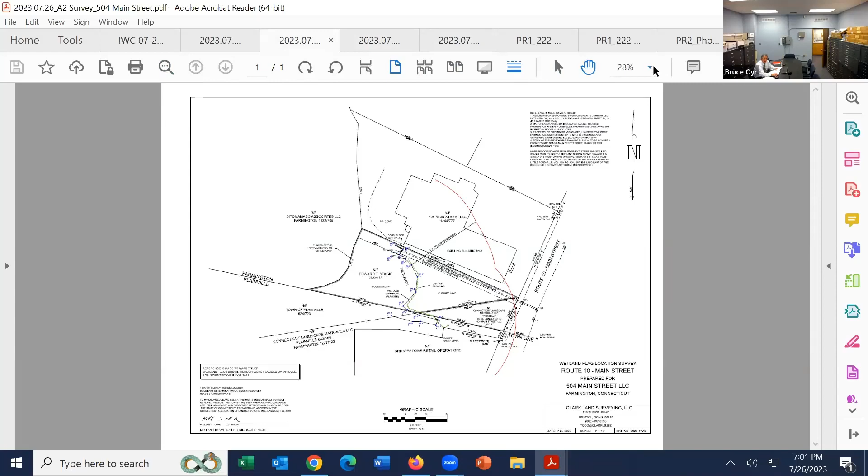I did get an updated survey from the surveyor. You can see where the wetlands pretty much follow the toe slope through that whole thing that has been marked out, flagged out. I guess he flagged it like a day or two before the meeting last two weeks ago that I wasn't aware about. So we met them and he mentioned he already did it, they just didn't have a chance to get us a map. So the wetlands have been flagged.

We met on the... but Bruce, go back to that map for a minute.

Because it looks like there's two property owners. Yes, here's that line, here's the one that he bought, he purchased this, and this is the one he's trying to buy now. So as we said last week, a large part of it is on property that is not his. He mentioned he's in the process of working with the attorney. Unfortunately the person has passed away and their heirs had passed away too, so it's a very long list. He's working through the courts right now to get this resolved, but apparently it's pretty easy, is what they said.

So I went out there on the 17th, right after that 3-inch storm we had that Sunday. I met up with Ian Cole, the wetland scientist. The surveyor was out there as well as the owner. So here's some pictures that we had taken.

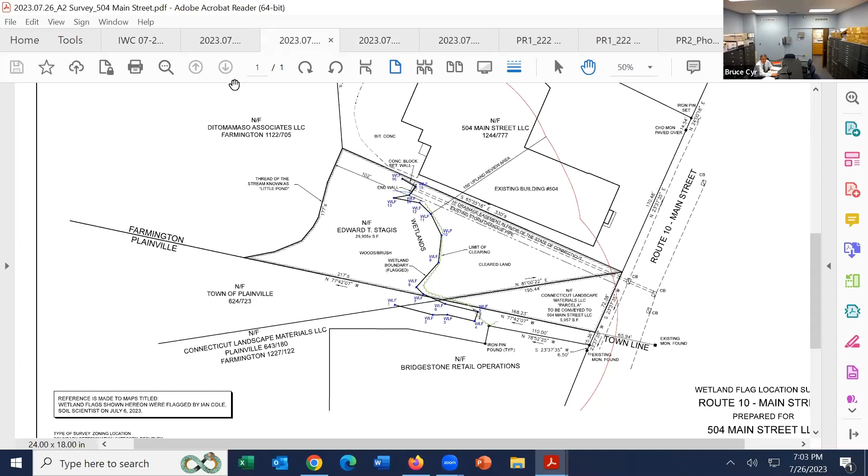Here's that large storm drain outlet that comes from Plainville. It drains a big section of Plainville, comes around and back to here, comes down, curves around, goes out, and then goes out to the Pequabuck in that direction. So as you can see, is that the state owned drainage?

No, the state's on the other side, on the north side. But here we are looking to the north along the side of 504. This was the area where he had put some fabric or some geotextile down to try to stabilize it.

Wrong way, sorry, wrong way. So you can see where the river had backed up into this little tributary swamp, and it had put this silt fence underwater in certain locations.

Pretty much right up to the toe slope is how far it came. And here's some of the flagging he did. So I think when you look out here, you'll see he more or less staked along the silt fences where it was.

Here's the outlet along the south side of his property that he wants to extend. So I did discuss with him our concerns: if this is a 3-inch storm and the water is backing up as it is, extending it further could only exacerbate the problem. So they're aware of that. As it is right now, that outlet is underwater.

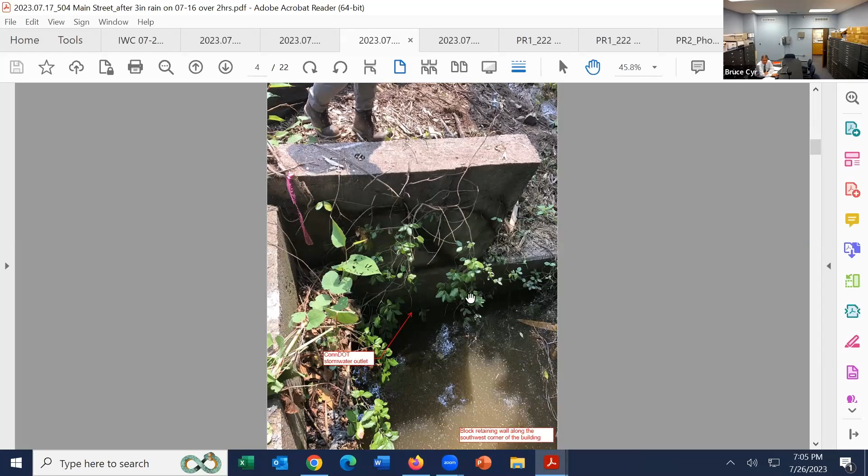And this is the wall along his parking lot that's starting to fail, and the water comes out this way. So he is claiming that this is undermining his retaining wall, and it is starting to collapse. It's just a bunch of concrete blocks and mismatches. This is off the back side of his property, beyond the parking area.

So this is looking out at the tributary towards the Pequabuck. It's pretty much right up, pretty much follows his toe of slope all the way around and then along the back. So at that meeting, we did discuss with everybody what we wanted to see.

As part of it, we talked about pulling this slope back to a minimum 3-to-1 to soften it, so it would stabilize better. Ian Cole, the wetland scientist, said he wanted to see this stuff removed, he was concerned with amphibians coming in and out, not wanting them getting caught in the mesh, which looked like it had fiberglass or plastic in it. He did not like it and wanted it out if possible. So I said if we actually pull it back to 3-to-1, then it should work. And we also talked about what you have here.

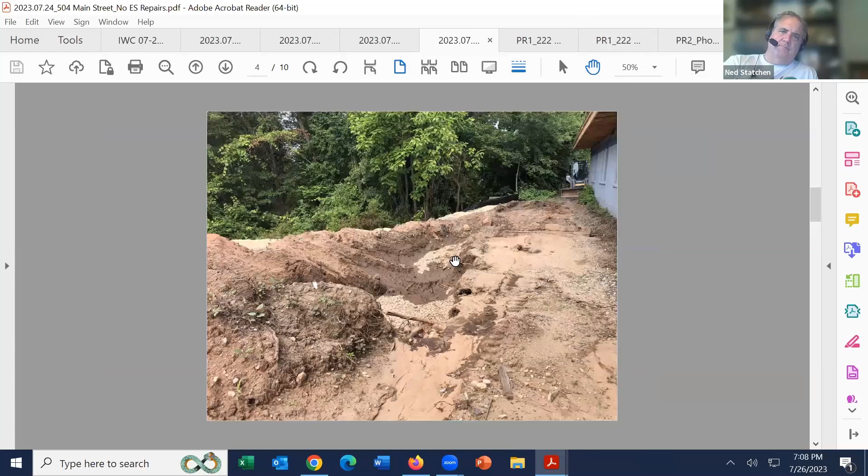So as I mentioned to him about getting some sedimentation basin in, he dug this large hole in here, and we'll see how that works out for the time being.

The water has subsided at this point. Also, we talked about digging that pond. We also talked about resetting this silt fence that was damaged, and adding hay bales or straw wattle, something along those lines for erosion control, to actually reinforce it, and then to grade the slope back 3-to-1.

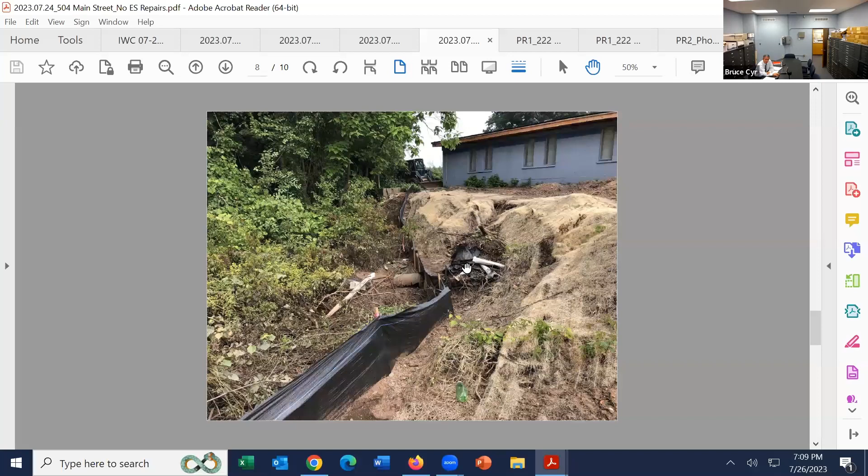So at this point, a week later, the work was not done. You can see the slope right here, that's where the roof leaders were coming down, washing out. There's a bunch of debris that he had pulled out of here and from the property, he said.

You can see how the water has receded back. But even looking at this picture, if you look at the silt fence, and you look to the right of it, that area looks considerably lower than the area to the left, which is where a lot of sediment appears to have accumulated. Or is that just an optical illusion? I think it's the type of material too, a little bit of both. It's the fines coming off the top and just washing down.

This was after that 3-inch storm, so we had quite a big deluge here.

I had since talked with the owner, and he is out of the country. He had a death in the family, so he could not make the meeting. I mentioned that we were having the meeting anyways, and I expressed how important it was to resolve this issue, because I want to get the erosion control in.

We talked about at the last meeting possibly doing some test pits out there along that silt fence, just to confirm the wetland location. Ian mentioned he had gone back, dug down as far as he could with his core, and he was pretty confident that was the wetland. But I said, you know, the machine is there, I'd like to just double check, do a few test pits, and confirm it is, as you say, along that toe of the slope. So we talked about that.

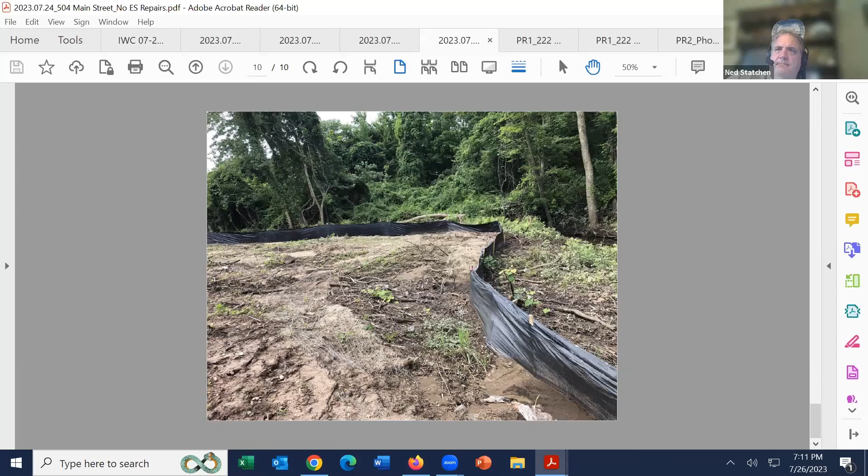We have been getting, as you know, quite a bit of rain, so there's a good chance we may get something to come up there. I said at least it'll help. Then after that, when we get into September, October, that's when I'd like to get the plantings installed, or whatever we agree on for a final restoration plan.

So Ian is still working with the owner. They have not agreed on a contract at this point, so they have to get that going. But I was pretty clear with them that by the first meeting in September, we should have something for the commission to look at.

Assuming that we need two meetings to go back and forth, he's ready to go the first week in October.

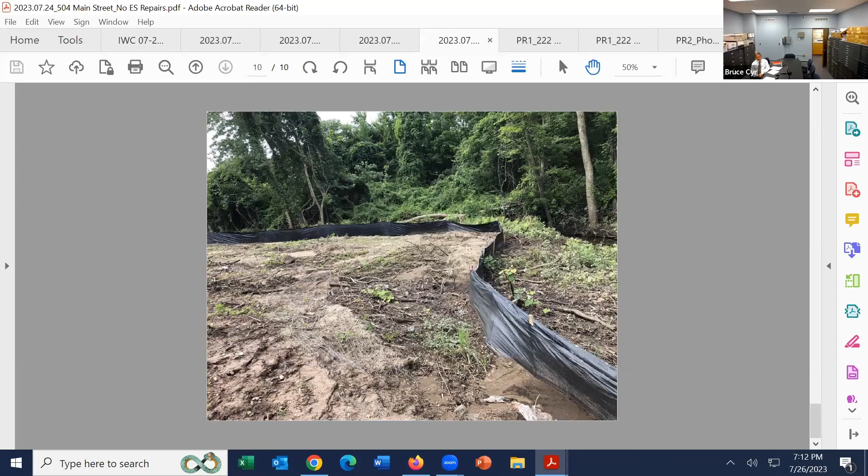So if anyone has any questions, just let me know. I'm not sure where to start. I guess I'll start with Rich. What's your feeling on this?

Well, I think Bruce has got all the key areas covered. I mean, getting it at least temporarily seeded so we're not getting any worse than it is, and doing something so that the roof leaders don't destroy the place.

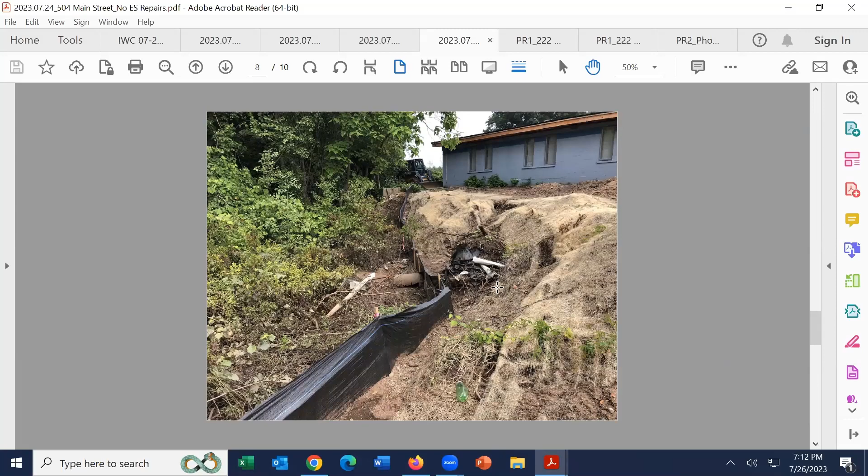As long as it doesn't get any worse than what it is, I think we'll be doing good.

Okay, Dave, your feelings? For the record, I did watch the meeting I missed last time to hear the start of this terrible saga.

I was wondering, it seemed that the map you showed, the wetlands kind of coincided with the extent of clearing. Yes, everything that was cleared was not wetlands, and what was left was wetlands.

You were talking about making test pits. Are we going to do that? I would hope to, to make sure that some of that cleared land wasn't also wetlands. Up in here, yes, that's what I was talking about, because when we were...

Yeah, I just wanted to clarify that. Exactly, so it'll be on the uphill side of the silt fence, just to confirm that this line did not move up at all. Okay, that's all I have right now.

Thank you. Thanks, Neil? I don't have too much, just a question on the picture you just showed, Bruce, with the fabric material, whatever that consists of.

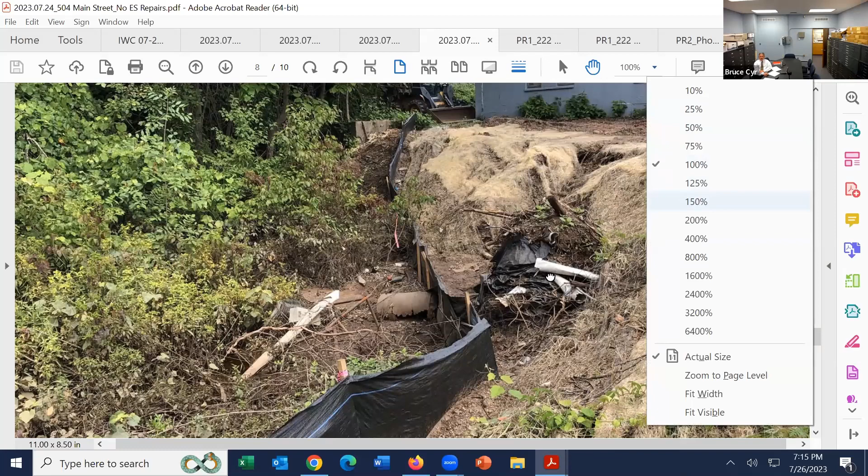Is that a pipe in that photo, or is...? I think it's a rotted-up piece of an old drum. Let's see, okay, I think that's what it was, see, it's like an old drum. So, like he said, there was a lot of debris on the property.

You could see there was a lot of debris on the other side of the fence down in here. I think partly maybe some of that is from the storms over the years, as the water level rises and falls, it's bringing all this debris along the river as well.

So I think kind of a backwater. Yeah, it's kind of a combination of both. I didn't have anything further.

Thanks, thanks, Mark? Yeah, the only question I have, Bruce, is on the pictures, there were two pictures that showed you outlined in red. Were they what you suspect as the wetlands area? What was that all about?

Oh, that was before, that was the earlier map I had, but I think what it was, just showing what we were doing, is we were using that map out in the field to mark it out. So that was just showing the red location of the wetlands, and we had some notes written on there. Unfortunately, that was the only clean copy I had, but I wanted to get something over to you guys so you had it.

I just got this cleaned-up map yesterday. Okay, I have nothing further.

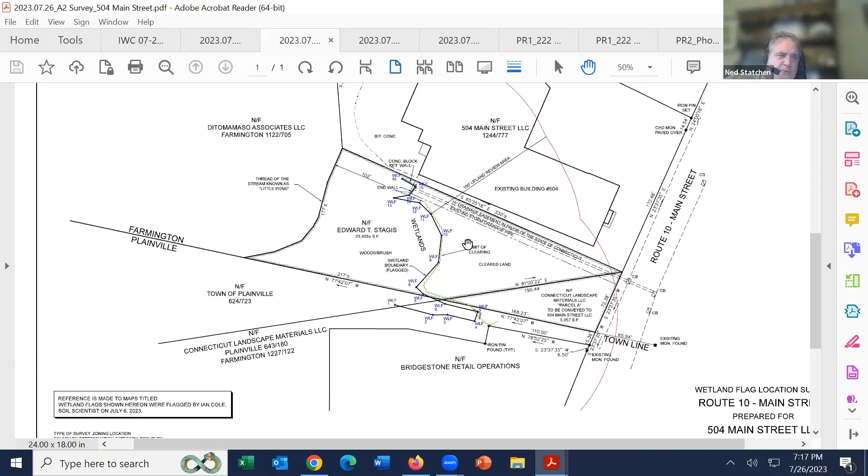Thanks, Mark. Ned, can you just review again what property is his and what he's trying to buy? He owns this - he owns 504 now.

You can see the property line is very close to the southern side of the property. He purchased this property, and this was part of a larger piece. Here's the Bridgestone property - yes, it had a larger piece that extends out and goes into Northwest Drive. So the owner had cut it at the town line and sold him this piece here.

So he owns this, and he's in the process of purchasing this. Apparently, he has spoken with one of the descendants, and they don't even want anything for it. They said, just take it, we'll give it to you. I didn't even know we owned it.

It's all - a lot of it's wetlands. There's nothing you're going to build there. But apparently, as part of the probate, some kind of fee has to be done as part of an assessment or whatever. So that's what they're working on now.

Okay, then like where the river is, I mean, that's all wetlands. So now to the other side - but does he have to work with whatever is on his other side?

What do you mean? Like if you look at the GIS map - it's 8384. It looks like it goes on for a long distance, but does it end? No, let me go back and show you. Let's go back to ours.

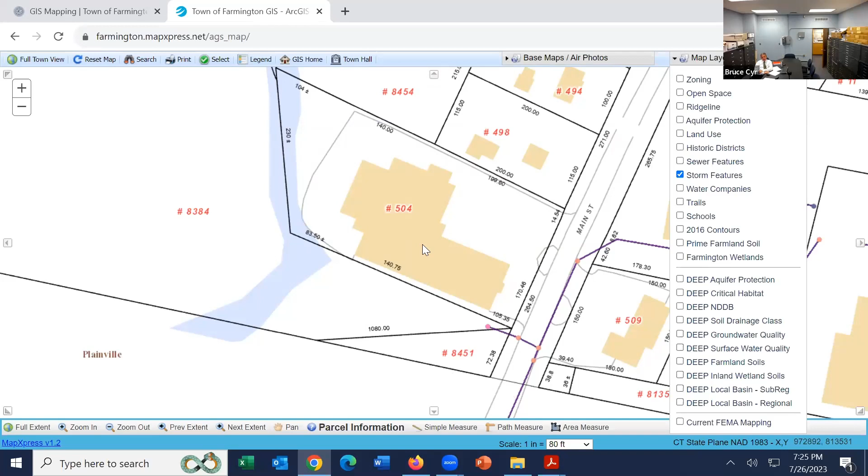So, without coming... on land he doesn't even own. That's the thing that kills me. Although that seems to be a growing trend in Farmington. I think he was pretty confident that he was getting the property from them, and then when it got buried it got put into the probate system, that kind of just put the brakes on it.

That's all I have. Thank you.

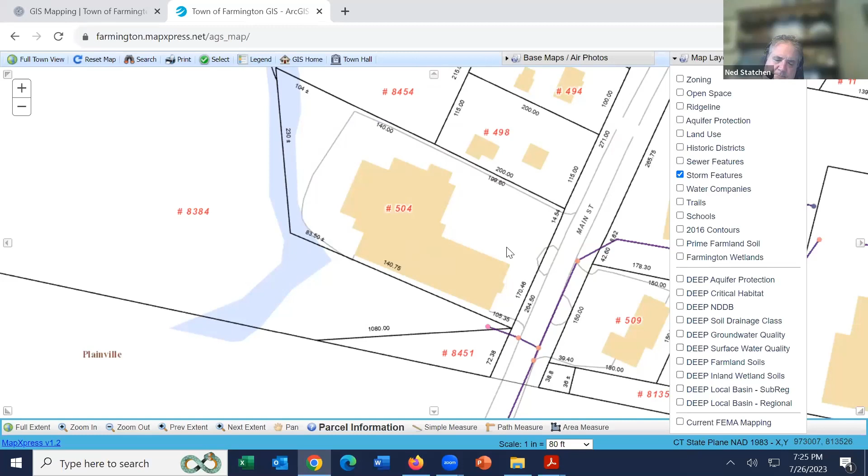My general feeling is we're already several weeks past when seed and hay should have been put down to start trying to stabilize the site. We started on June 28th, that was when we first saw this. So we're going on a month.

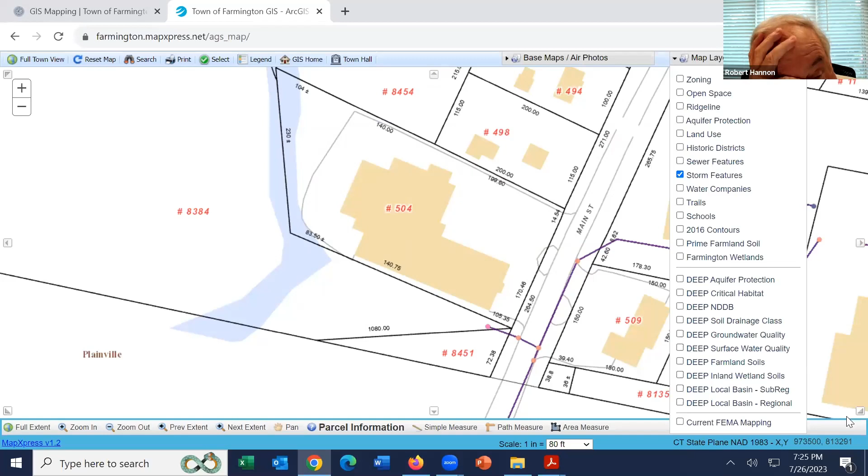I don't have an issue with the 3-to-1 slope. I know it makes it easier to stabilize. And having the erosion control measures at the toe of the slope is good, but again, the way I'm seeing the water run off of this site, I think there need to be erosion control measures at the top of the slope as well.

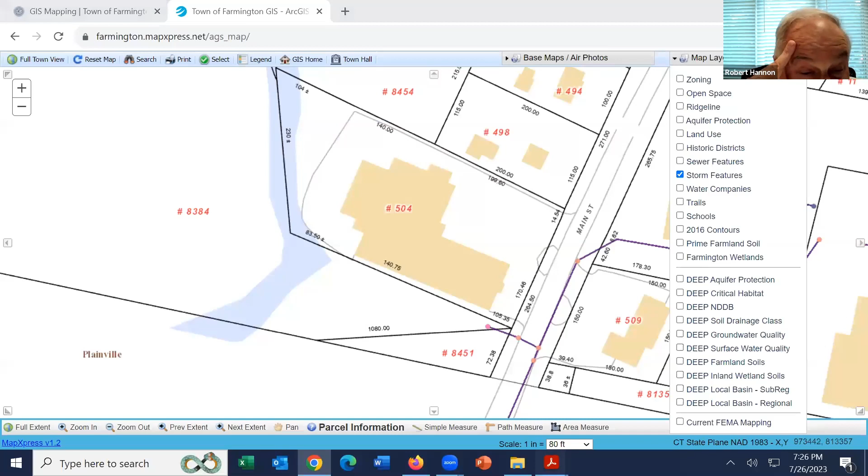Where it looks like he's taken a bulldozer and cleared off that whole strip of land right by the building, he needs to be putting in some kind of check dams over there, whether it's hay bale check dams or stone check dams. I don't particularly care. We had talked a little bit about that as well. You're talking about this right here.

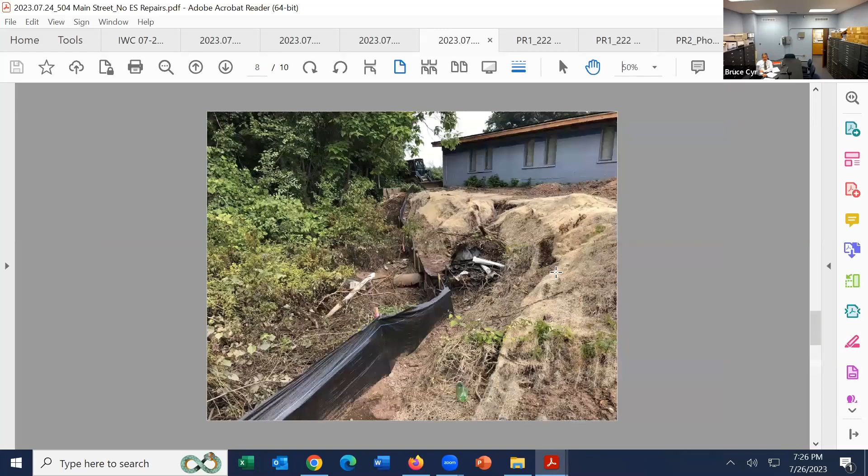Right in here. Yeah, I mean, you've got to put in some kind of check dam, whether it's a hay bale check dam or stone check dam. That's not an area that's really supposed to be used for vehicles at this point in time. No, it's not. He had pulled away from it.

The only concern we had with that was these doors. As Ned said, this building is really funky and weird, and there's all kinds of step ups, step downs. The only thing I was really concerned about, I told him, is those check dams can't be very tall, because it could actually build up and run right into the building. So we did have some concerns with that.

I understand that, but you've got to slow the water down somehow. Yes, it can't just continue free flowing like it is.

And again, it goes back to the old issue we deal with, it would have been so much easier for somebody to come in and just talk to us, to let us know what we wanted.

And it may have ended up saving them a lot of grief and aggravation in the long run. But he's gone ahead with this. I think he's alienated members on the commission, and if he's trying to do anything with this site, my guess is it's going to be a long memory. I don't think people are willing to cut him any slack on that. So he's going to have to make sure anything he comes back with is top notch, and probably have to go above and beyond what somebody else might, just because of what he's done here.

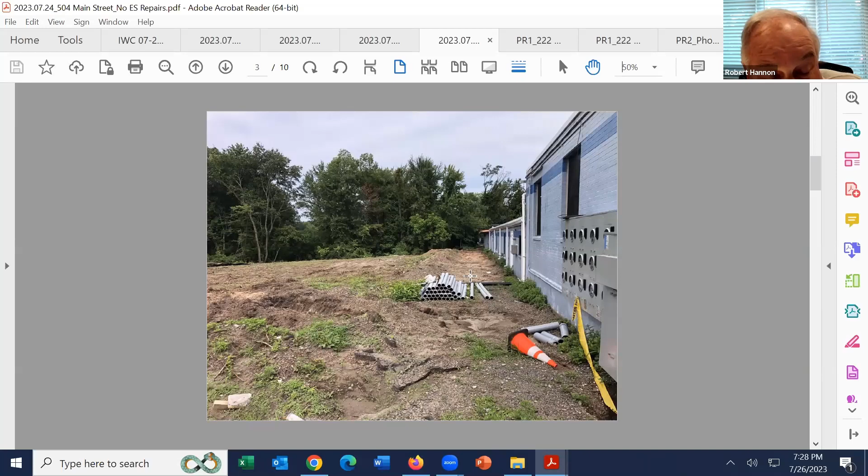That's what it looks like. The netting that he put down, to try to stabilize the slope, without stabilizing the slope first. This is why it looks pretty funky out there with the way the mats are laid. So yeah, to me, he's really at least two weeks past where he should be on this site, if not longer. I thought we kind of mentioned that the first time we saw him.

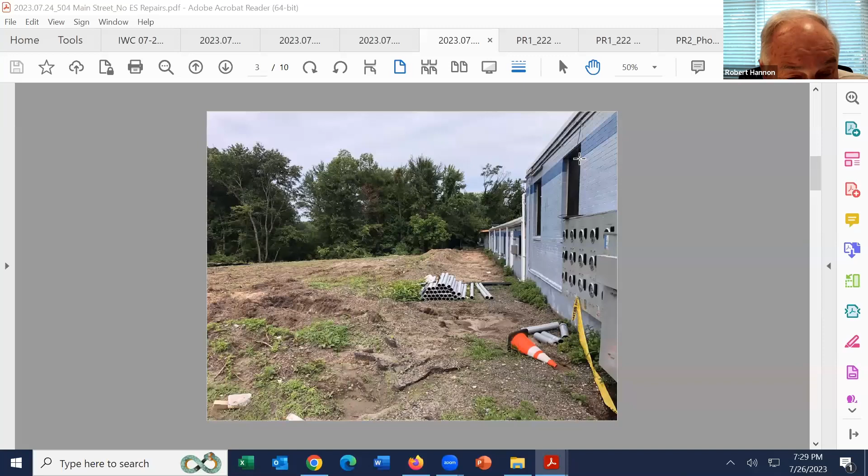I'm just not overly thrilled. And again, he does not have a contract for the wetlands party. Who does he have a contract with for doing any work out here?

I think all he has right now is a surveyor, the surveyor slash engineering office. So I think what happened was the engineering office had called Ian, who they work with, and he had gone out and taken care of it. So that was the immediate concern at that point.

So I think the next thing is for them to actually sit down and come up with a contract, because number one, we don't even have the wetlands report. All we have is the wetland delineation at this point. So I think we want some kind of wetlands report and a wetlands function and value assessment.

Not knowing what that is right along the toe of that slope. Is it just a drainage area? Is it a valuable wetland? What's in there? Maybe Ian can attest to that, and that's going to tell us how far off we're going to need to be offset.

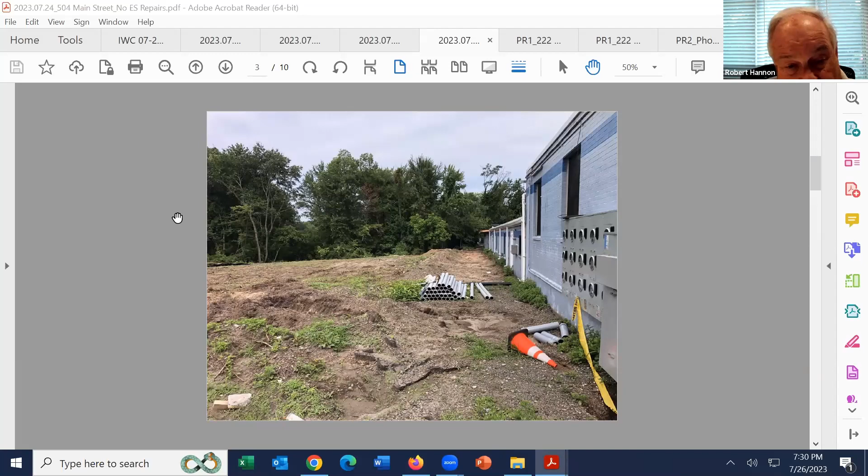Yeah, because again, looking at the way the property is currently laid out, and you were showing it, that was the state drainage, right? That was actually backed up to the top of the pipe. Yes.

Do we really want the toe of the slope right there?

Herein lies the problem, and that's kind of where I was going with Ian. Ian had said he did a lot of research on this before he went out, and he said pretty much, from all the historical photos and historical information he had, this is pretty much where the toe of slope was.

So pulling it back, yeah, we can do that. But I think that's what he was pretty adamant about, that this is where the existing limit of disturbance was. Yeah, but that doesn't mean we have to have the slope go right down to the wetlands either. Nope. It's something that definitely, once he gets his report and we get these guys at these meetings, we could start discussing these questions with them.

Well, I guess the concern I have is, maybe it's the language you're using, because I'm not sure discussing anything is going to get much done here. It may be more a matter of telling him what to do, because we've been discussing it for about a month, and it's like nothing's been done.

For one, I'm just not thrilled with what hasn't occurred here. Me as well, I'm not thrilled with what did happen there either.

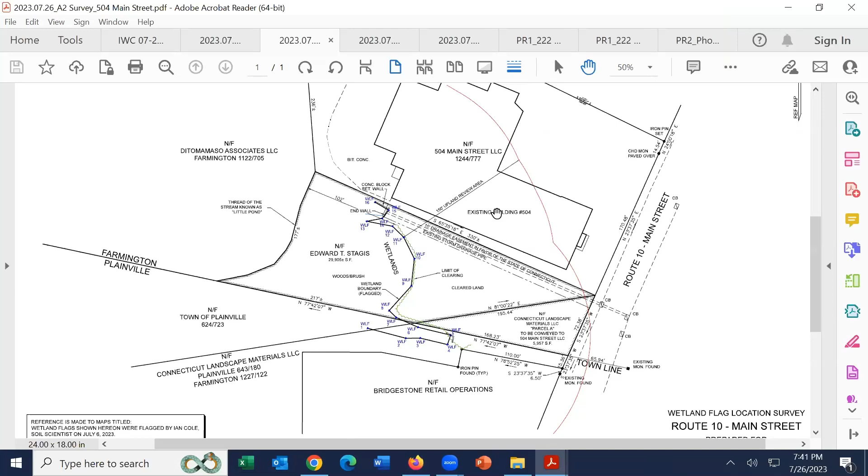The other thing is I know he's got concern with this wall and the drain, and he wants to extend the drainage. He might as well wrap that right into everything else, so we look at this once and have a comprehensive plan on what he wants to do.

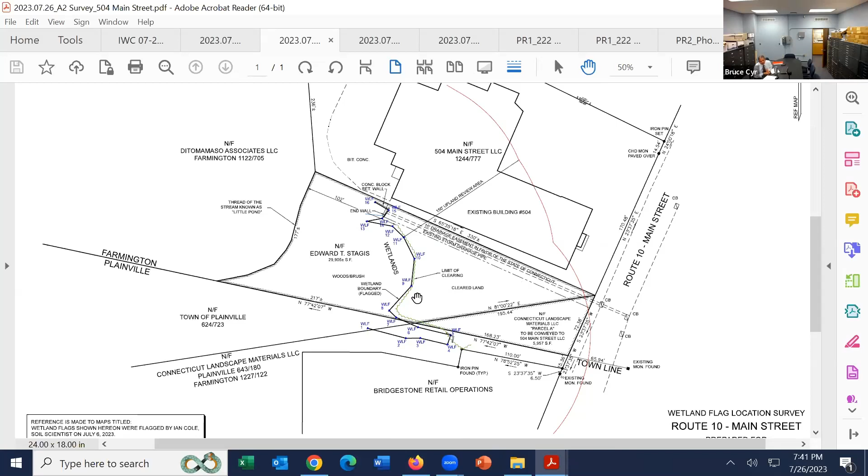Agreed. Rich, I had mentioned that to him, and unfortunately when I told him, when we were out there during that flooding situation, I don't know how much of that's even feasible. That pipe was probably, I couldn't even see it, but I want to say it was what size pipe is that? I forgot what size it was. 15-inch? No, I think that says a 15-foot drainage easement. But I want to say it's probably like an 18 or 24. So I told him, look, I couldn't even see the pipe.

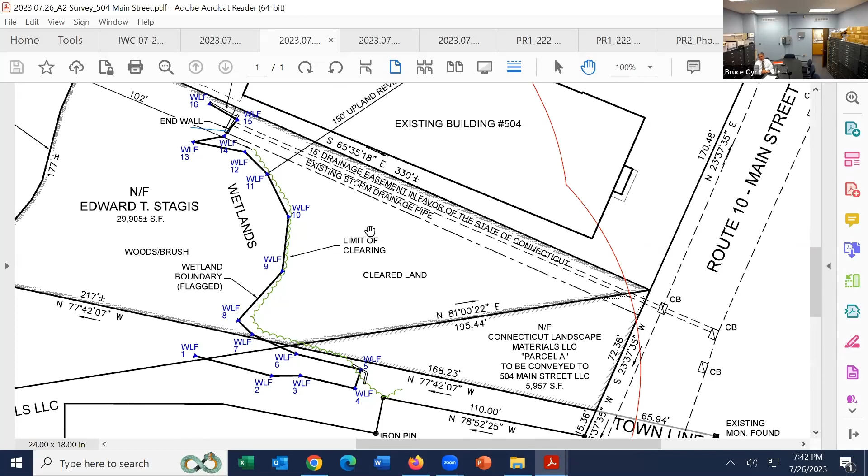So that thing is anywhere from 2 feet plus below the water line. Extending that out is just going to make it worse. That pipe will be underwater, and that was just a 3-inch storm. What's going to happen during any of the larger storms we have? I think there are going to be some questions, and on top of that, what are we getting into in terms of Army Corps permits with how much more disturbance we're going to have within a designated wetland area?

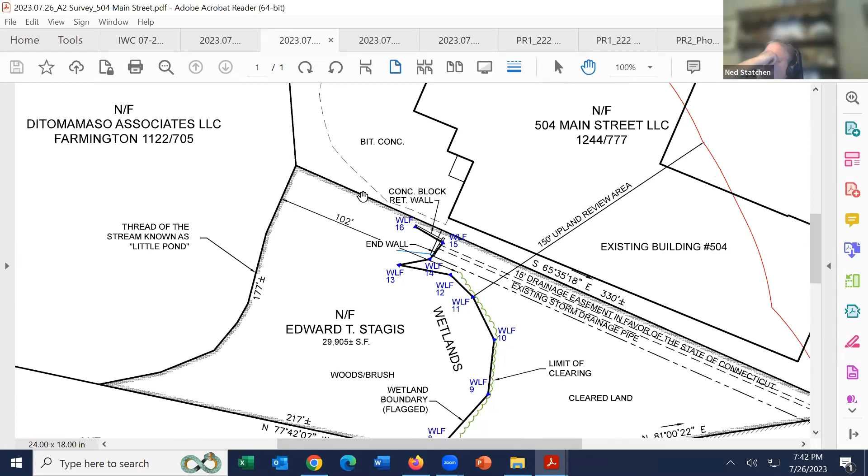You might need a pipe junction box to keep the water from the river from backing up too far into the pipe. It's a state pipe, and you guys know more than me, but I don't think they would want to have any kind of system.

I told them what I would do is this: I asked them to go out there, look at this flow line here, get the flow line, see what the slope is on this pipe. If this is a 0.5%, there's not much you can do. If for some reason it's a 2, 3, 4% pipe, then you can go back and add a structure somewhere, or either relay the whole pipe, or add a structure here and adjust the slope so you can start softening out this slope, to pick up that pipe. So that was my recommendation to them.

Or redo the alignment so it doesn't discharge so close to his building. Put an angle point into it. But whatever he's got to do there, DOT's got to sign off because it's their drainage. They had mentioned that they'll review it and approve it when they're done, but that they're not going to pay for anything.

His immediate concern was trying to save his parking lot, because as you saw, this wall over here was getting ready to fail. That's what he's concerned about. He doesn't want to lose the parking lot because he'll lose the material around the building, and that could just domino.

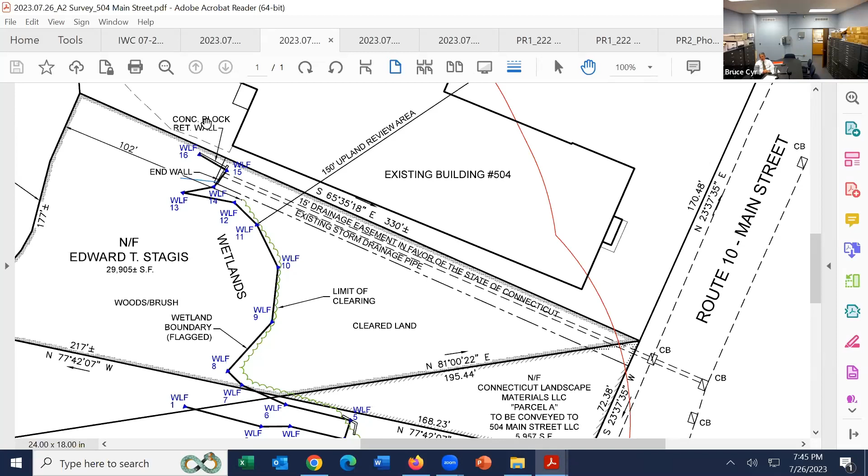But yeah, that is definitely something we consider, especially on brand new buildings. On a retrofit, we are held to some kind of limitations of the property.

Yeah, it's a weird property. There's a low section where there's an L in the building, and it's kind of narrow at the north end to get through there. That opening in the parking lot, you can't get a car and 2 cars going in each direction. If there's people in the back parking spots, it's only wide enough for 1 car.

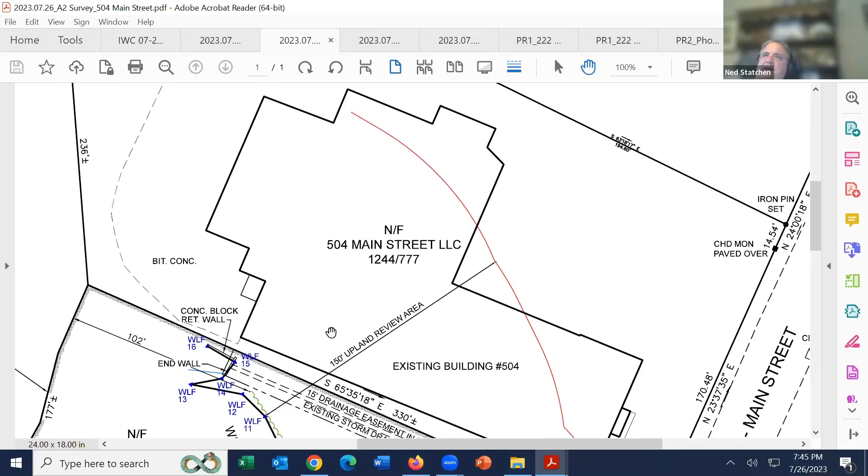Yeah, the building looks like it must have been expanded a dozen times or so. And then it's hodgepodge everywhere inside. Inside has been cut up over the years. There was a fire that was fixed.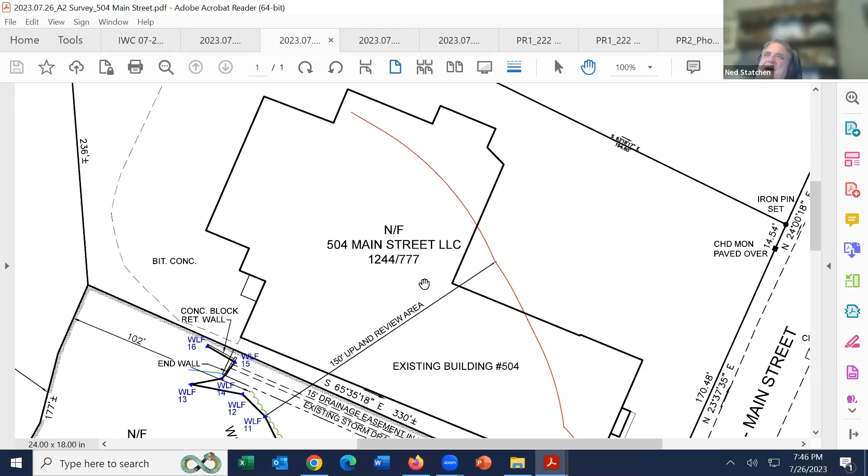I guess when Eversource went out, there's a utility pole right through the roof. It goes right through the building and right up the roof. We're like, oh, we can't have that, so they have to fix that. And that's what he's doing with this underground power and this whole new system, this whole new bank of meters on this side of the building.

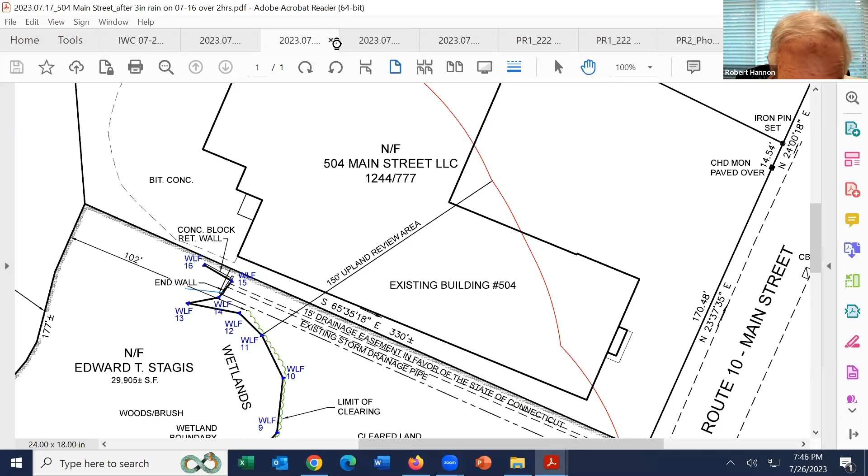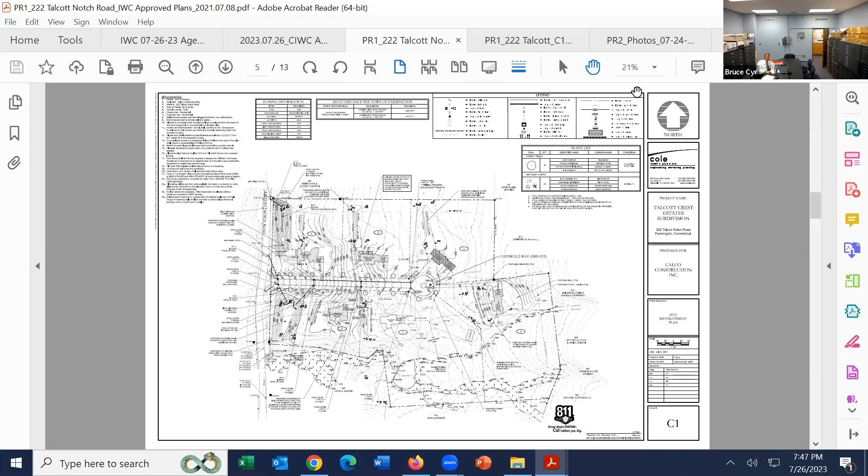Updating everybody, let's see, oh, my agenda. Yep, 222 Talcott Notch, you guys had approved this some time ago. What is it, 2021? Yep, 2021, so this is what was approved by the commission at that point. I think everybody was here, right, when this was approved? I don't think I was. I don't know that I was. Oh, okay, quick little summary, let's John drive over there.

Mountain, here we go. Copper Beach is right here. Aqueduct is right here. All right, here's the property right here. There's a private road right across the street, the Cotswold Way.

It's broken up into 3 drainage areas. There's this drainage on the north, which flows out to here. This has since been removed, and the town piped it all the way down and around. We have this drainage here, which is the center portion of the property. This drains out, runs along an old swale between these properties, out to Waterville, underneath Waterville, out to the avenue.

The third drainage area is down in the lower section. That includes a pond, an old historic pond.

I haven't been up there. I guess you guys were up there. It's a pretty well historic architectural house. It's pretty amazing from what I'm told. This pond is just as amazing. It's the way it was built. So the water needed some work, though. What's that? It needed some work, the pond or the house? The pond. Yes, there's a dam. There was a dam that was in need of some work. Yeah, pretty bad.

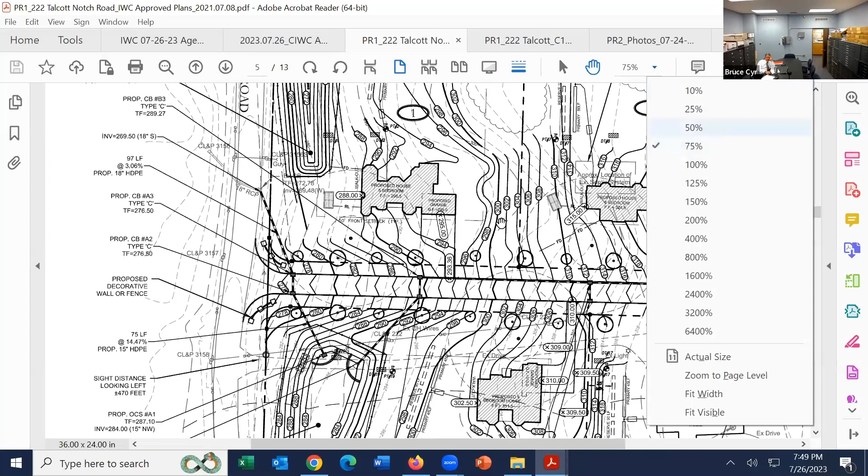Go back to the proof to what you guys had approved. It's broken up with the road in the middle. We have a detention basin on the north, and then a detention basin on the south. At that point, we did not get much into the drainage design in terms of the areas and the flows, and we were just looking at how he's handling the water quality, and that the ponds were adequately sized.

At this point, you could see this pond took water, piped it across into this system, which runs into this swale that runs behind the homes on Copper Beach and Cotswold Way. So of the 3 drainage areas, this is probably the most sensitive in terms of flooding issues and items like that. So what happened is the drainage plan showed an increase in peak runoff from here, and eventually a volume as well, and a reduction to the north and the south.

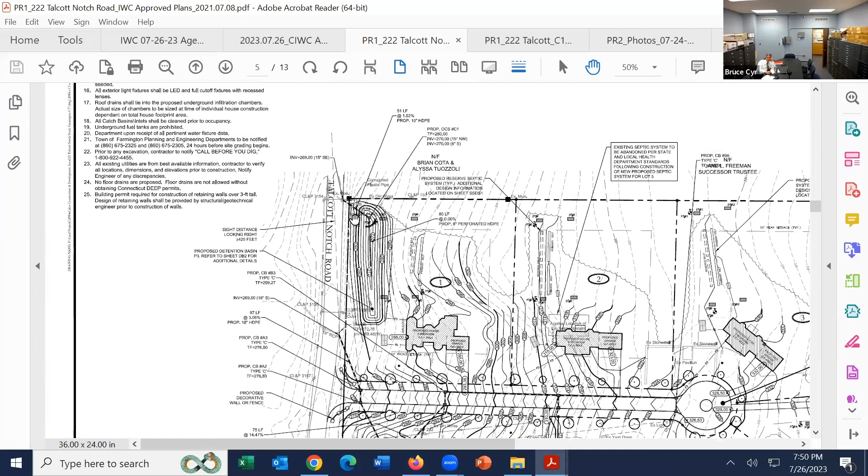Overall, the site was a reduction, but looking at it further, I said, look, I don't want you adding more water to this swale. I wanted you to break it out and divvy out the water to these other more capable and stable channels. So as you see, that one went out to there, into that swale, and then this one went through this basin, storm detention basin, out to the north. So that was what you guys had approved.

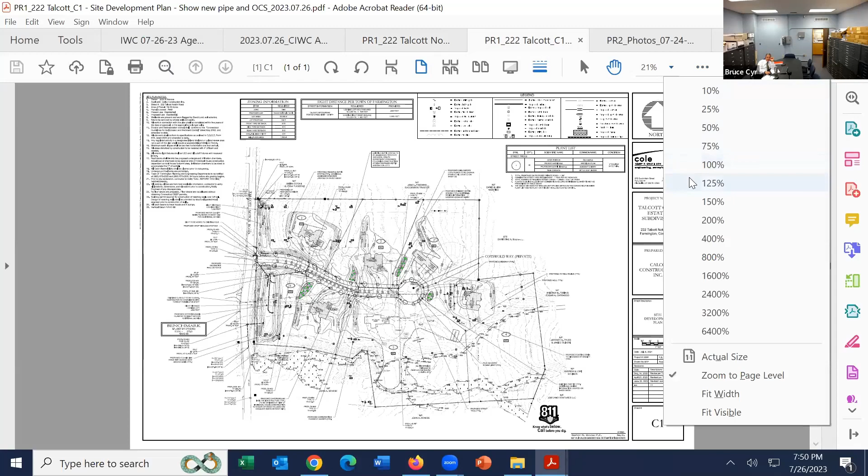Since that time, we came back. As I said, there's been some modifications. One of them had to do with revising the road a little bit. We wanted him to tee it up with that private road, Cotswold Way, make it a little safer, because we have Copper Beach right up there. There's a couple intersections. So as part of that, and then what we wanted him to do was break up those drainage areas. As I said, he was sending too much water down this pipe.

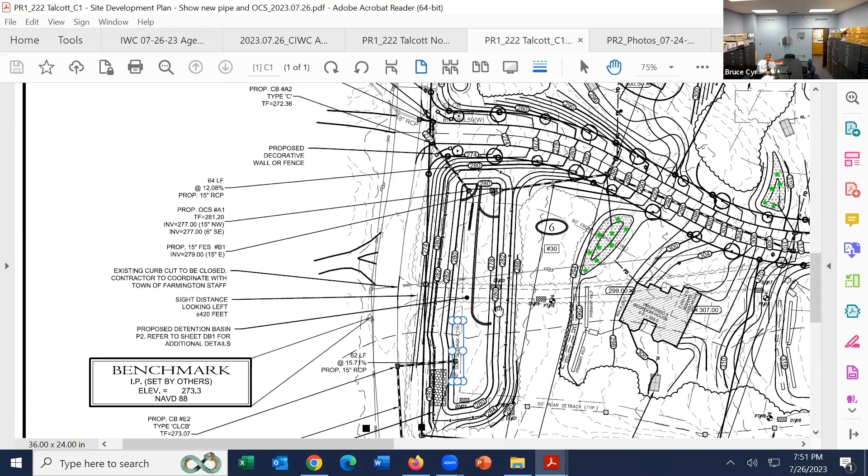So what we had him do is they came up with a design where we have technically 2 outlet structures in this pond, and they're based on orifices of different elevations. So it's a metering system.

So what's happening is the water from the whole development, and we also added some water quality treatments through here. We've had some rain gardens. There's an infiltration system over here. So everything from the houses will go into infiltration systems, all the roofs. The roads will come into these infiltrators here. There's no curbs. Everything will run off into these curbs or into these basins, into these rain gardens.

Everything comes in here into the rain gardens, flows back into the drainage systems. So we have water quality throughout here, picking up the yards, piping it back, overflows back into the ponds, and they drain into this pond. From here, we have 2 outlet structures. We have one here, and we are metering the flow, some to go north and some to go south.

The idea is to match the flow that was coming to this pond or swale before, and put some back into this swale, which can bring it back to existing conditions. Just wanted to let everyone know where we stand at this point.

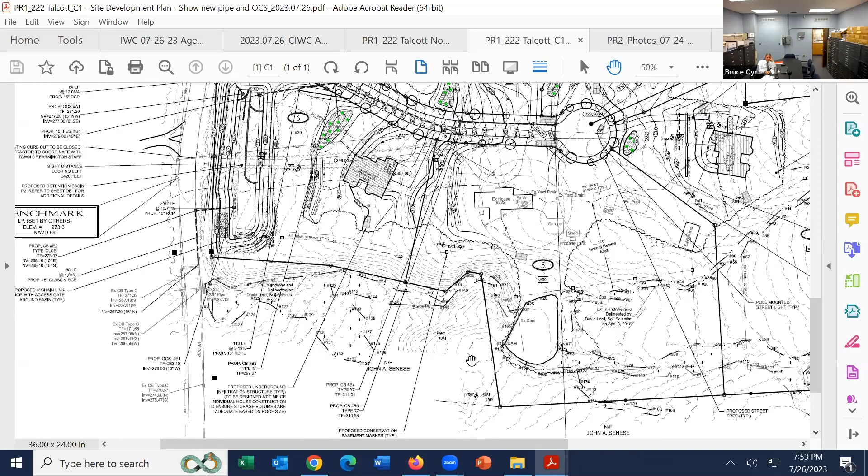This is going to zoning next week. They have to close the hearing, and then the commission will vote on it. I'm not sure if they'll vote Monday night or the first weekend of September. We talked to him about the pond. Since 2021 there's been some more damage to the pond, so we definitely want to do some repairs out there. I cautiously advised him to make sure he comes to the commission first, since I don't think the commission wants to see another violation, so he understands.

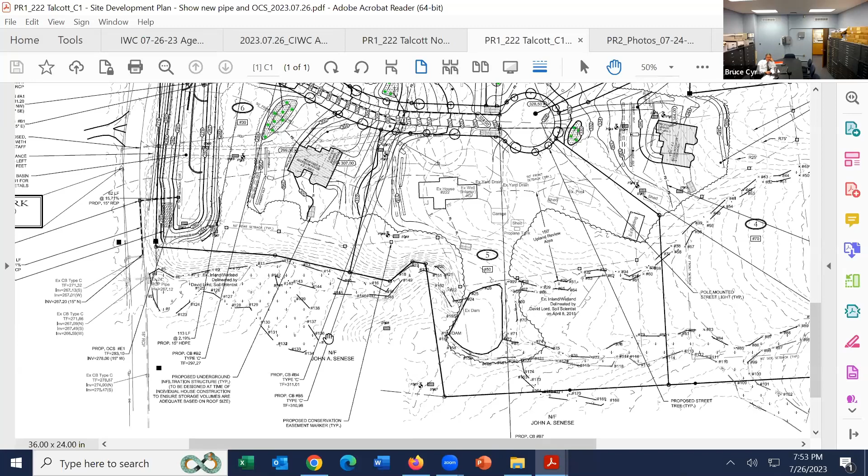He'll be back when he's ready with a plan to actually do the pond. As part of that, we made some revisions to the easement as well. We encompassed the whole pond in the conservation easement, so there will be a small exclusion in the easement document for him to maintain that pond as is. That was just more of an update, wanted everyone to know where we were changing things and how things were moving.

I think it was a minor change. I don't think it really needs to come back to you guys for a site plan review, but you can definitely let me know. Everything is still the same - we still have detention basins on the north and south side of the road. We've added water quality rain gardens and infiltration systems, so there's been a lot of improvement since the last wetlands meeting.

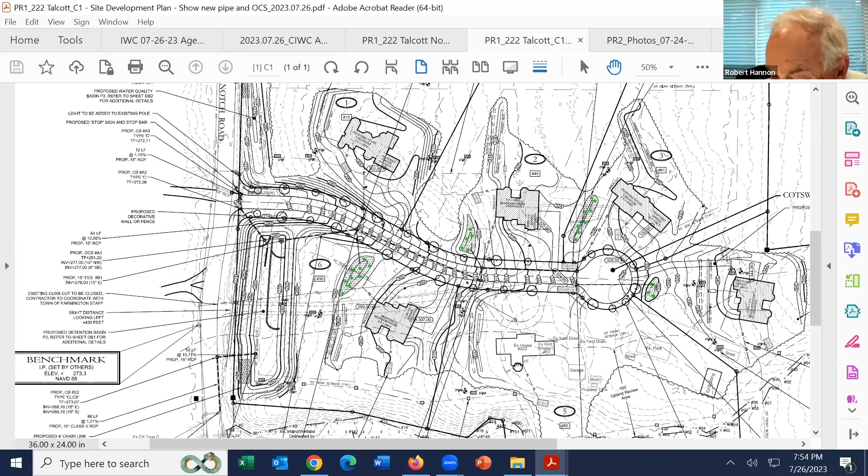Rich, what's your take? Do we need to do anything or just give our blessing? I don't have any heartache with the changes I'm seeing. I'm seeing it as actually a benefit with the water quality, the rain gardens, and keeping the drainage flowing the right way. So I'm fine with it.

Okay, thanks. Sorry for interrupting, but just so everyone knows, those water quality features were part of our engineering comments. That was part of the approval you guys did, so that's why these had come in. It's not like they decided or we decided at the last minute - this was part of our original review.

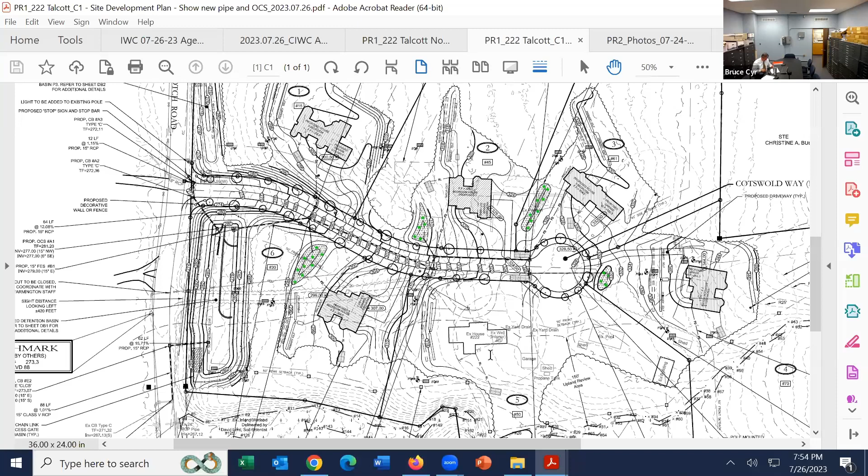Dave? Yeah, it looks good to me. I don't have any issues. Okay thanks, Neil - yeah, nothing from me. Mark? Looks like a great plan to me. Ned? Yeah, I don't have any problems with it.

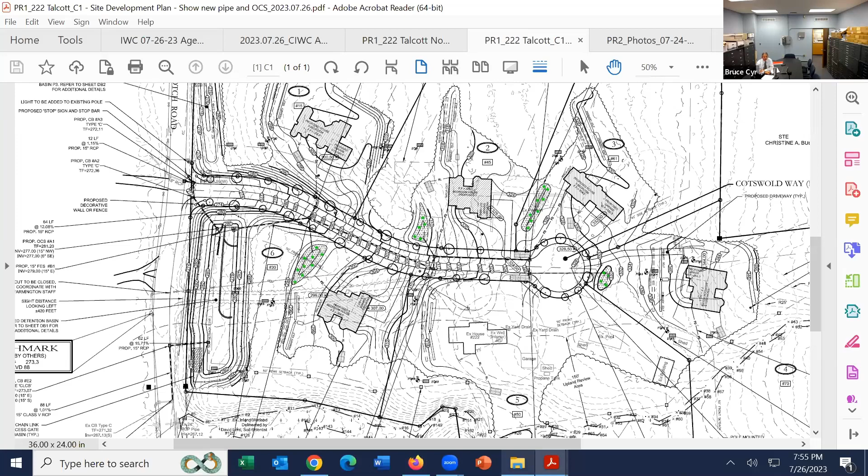I'm curious, is there that Cotswold Way you wanted to line up with? Does that service much? No, actually if you drove by you'd think, why is it a private road? But this was part of the subdivision. It maintained an existing driveway here, and there's actually 3 lots total. This lot, the person who owned it previously had owned this one and this one too. The new owner bought the whole thing as well, so I don't really see any improvements in the near future at this point. Both of these homes will tie into this section of the road as well.

But just again, especially in that area, it's a bit better - geometrically it's in a better spot, and the sight lines have improved. So just wanting to make sure we tee these things up wherever possible. Waterville Road is Route 10, right? Yep, yeah, okay.

Looks good. Okay, Bruce, I've got sort of one question - depending upon the state of disrepair on the dam, would it be more feasible to remove the dam and get rid of the pond? I don't know if he's willing to do that at this point.

The owner had mentioned - I don't know the whole history of the home, but the home does have some architectural significance, and the pond and the pool, I guess, are just as eloquent. I don't know who the architect was, but it's got a lot of historical elements to it, and it is a very gorgeous pool.